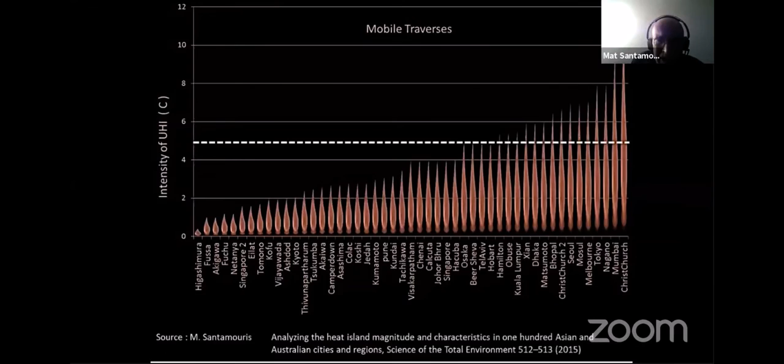But it's not just the increase of the temperature in our cities. This is combined with many other issues, for example, the prolongation of the hot spells. You see, in this specific graph, the hot spells above 37 degrees and also the hot spells above 40 degrees in the Mediterranean area. And you can easily understand that there is a tremendous increase of the periods with very high or excessive temperature in the Mediterranean.

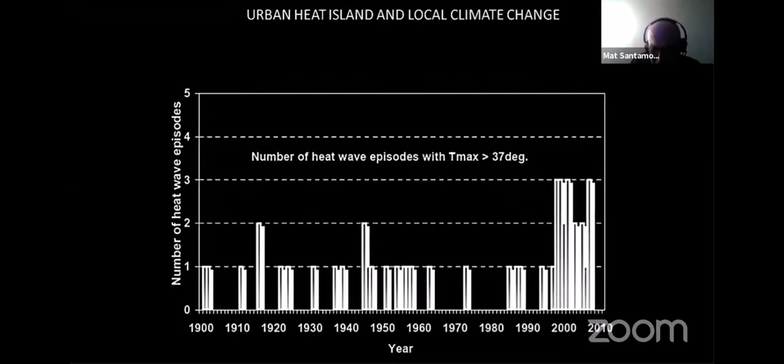And unfortunately, it's not just that. Apart from the temperature increase and the prolongation of the hot spells, we have a tremendous increase of the frequency and also the magnitude of heat waves. And you see, for example, what is happening in the Mediterranean during the very last years. It is evident that such an increase of the temperature and prolongation of the hot spells may have serious impacts on energy, health, sustainability, survivability, quality of life.

And during the very last years, a lot of research has been carried out, and many studies have documented what is happening regarding the energy and health and all the other impacts of climatic change in cities, which is called local overheating. Especially as it concerns the energy consumption and the energy supply, this is extremely well documented. And of course, it is very evident that once we have higher temperatures, the energy consumption for cooling is increasing tremendously. And we expect to have a lower demand for heating.

But it's not just that. The problem is that the higher temperatures increase the peak electricity demand, obliging utilities to build additional power plants. At the same time, they decrease the efficiency of the power plants, nuclear and thermal power plants, and also the performance of the distribution systems. All these issues are very well documented.

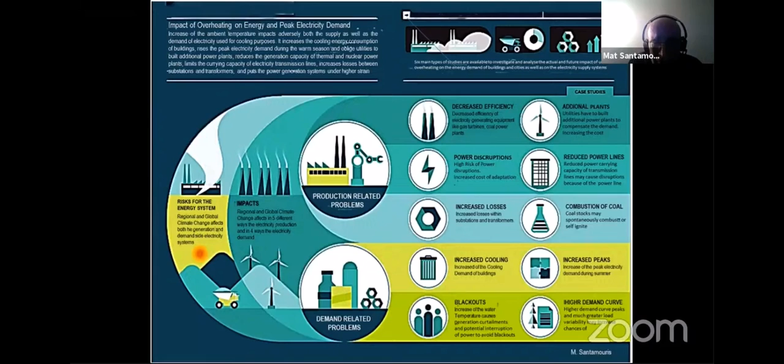And actually, for example, we know very well that the global energy penalty per square meter of a city is close to 2.3 kilowatt hours per square meter, while the global energy penalty per square meter and degree of temperature increase is 0.7 kilowatt hours per square meter and degree of temperature increase.

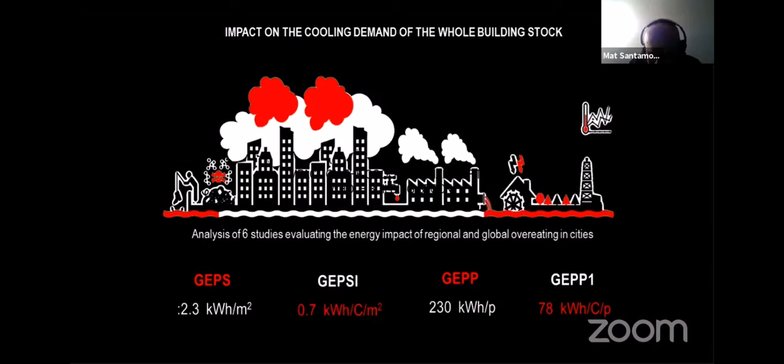But I think it is much better if we report the penalty per person, which is close to 230 kilowatt hours per person, on average all over the world, because of the global and the local overheating. So it is a tremendous penalty that we have to pay because of the increase of the temperature in our cities. And this brings us to the major problem that we will face in the near future regarding the energy supply and demand in our buildings. And this has to do with the future energy consumption for cooling.

If you plot the actual energy consumption for cooling, it is not so high. It is actually this red line you see there. But once we develop some scenarios about the future energy consumption for cooling the building sector by 2050, and we assign 3 different scenarios, one of low development, one of average development, and one of very fast development, we may realize, for example, that under the low development, we may have a tremendous increase

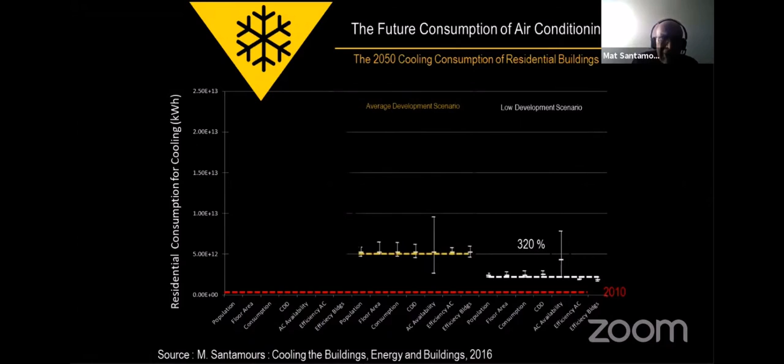of the cooling demand by 2050, which can be of the order of magnitude of 320%, 3 times more than the actual energy consumption. Once we consider an average development scenario, which is much more probable than the low development one, the expected energy consumption for cooling is much higher, and it's close to 750%.

While if we consider a very fast development scenario for the world up to 2050, the expected increase of the cooling demand will be of the order of magnitude of 2,270. Once uncertainties are taken into account, numbers are much, much higher, and we may reach an increase of the demand for cooling up to 2,670%.

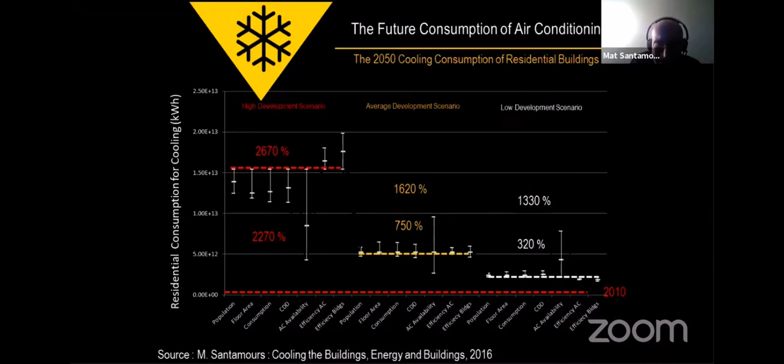This means that we need to have a tremendous number of new power plants. We need to have a lot of energy consumption, a lot of conventional or non-conventional fuels, a lot of peak electricity demand, a lot of emissions, CO2 emissions, a lot of pollution. So we need really to face the problem of overheating in our societies.

I will stop presenting you the data about energy because it's something that is very well developed, but I'd like to move to something which is extremely important: the impact of overheating on vulnerable population, on low-income people. You know very well that low-income people are living in non-well-protected buildings. They don't have the means to be protected, and at the same time, because of economic reasons, they don't have the means to cover the energy needs. So these vulnerable populations, low-income households, are the first victims of climatic change.

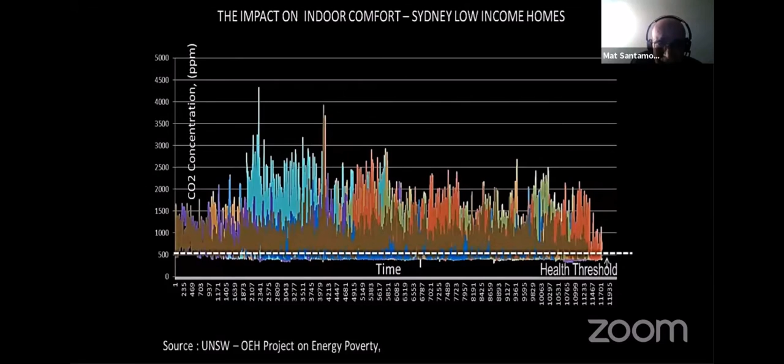And this brings us to the real problem of urban overheating, and what is going to be the main issue for the future about overheating: health. The impact of overheating, the impact of local and global climatic change on health. This is not such an easy task. It's not a deterministic approach where you can write an equation and find the association between temperature and mortality or morbidity. Because there are so many other issues that have to do with health, especially demographic issues, prosperity and income, the local climate, socioeconomic aspects, and the local infrastructure and health. So it is a little bit complex to understand and analyze.

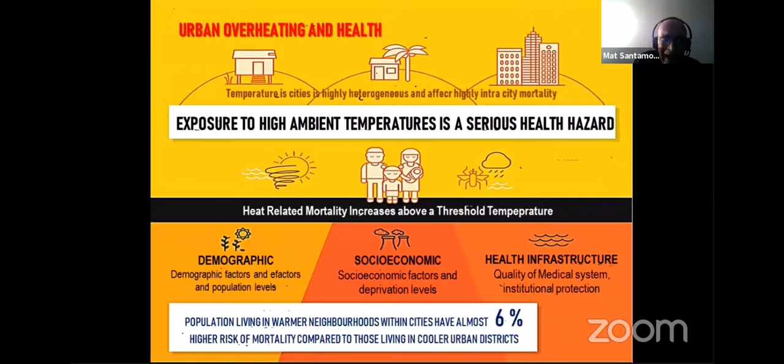But first, what is important to understand is that we don't have the same response to heat. For example, people living in the south of Europe or in the north of Australia may tolerate much higher temperatures than people living in northern countries like Finland or Sweden. This is very clear from all the studies performed during the last years, which show that the threshold temperature above which heat-related mortality is increasing is much lower in the northern part of Europe or the northern hemisphere. And this has to be taken into account by all those who say that it is good for northern climates to have the increase of the temperature.

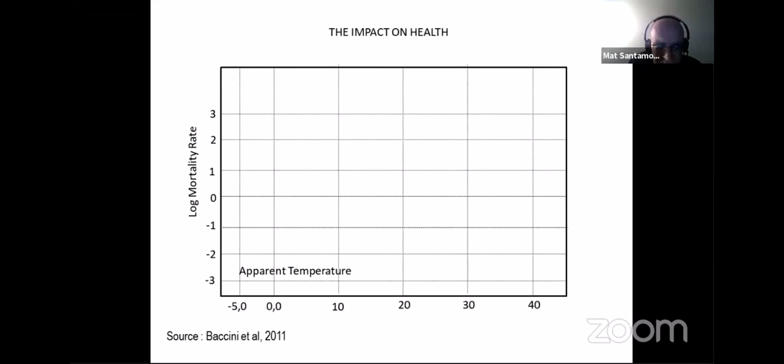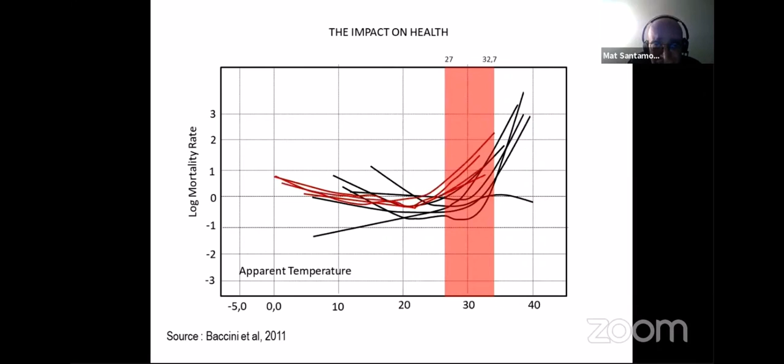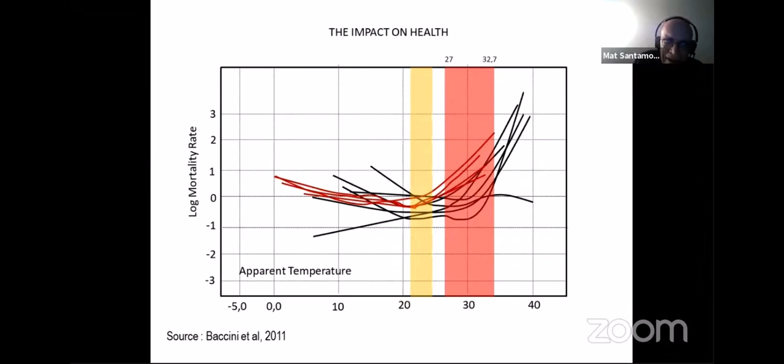And I'd like to show you the results of a very recent study performed in different European cities, correlating the indoor temperature and the outdoor temperature with heat-related mortality. You see, for example, the results for some Mediterranean cities, Athens, Barcelona, Madrid, Marseille, etc. The threshold temperature above which heat-related mortality increases almost exponentially is between 27 to 32.7 degrees. Once the same curves are plotted for northern climates, London, Stockholm, Finland, etc., you may see that the threshold temperature is much lower, 21 to 23, 24 degrees. So this is very important when we plan the mitigation, adaptation, and resilience plans for different parts of the world.

And this affects very much the quality of life in our cities, because actually we know that during extreme events, during heat waves, a very high part of the local population is suffering and is dying. And unfortunately, up to now, we have data only from developed countries. We don't have data from developing countries because the systems collecting health data are not really so well developed.

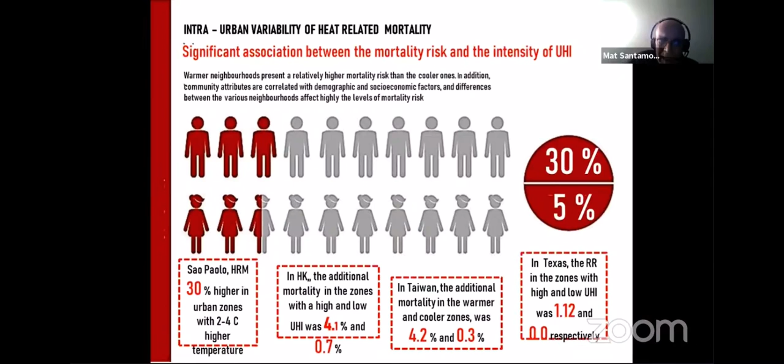What do we know? We know actually that in less developed countries, during heat waves, almost 30% of the population is affected and may suffer from increased mortality and morbidity. While in countries with very advanced systems of protection, this percentage may be reduced up to 5%, but even 5% is very high.

And I'd like to show you the map of the heat-related mortality in Sydney, a very developed city, one of the best cities in the world. In the eastern part of the city, which is next to the coast, temperatures are very low. In the western part of the city, which is close to the desert, we have almost 10 degrees of temperature difference in a distance of about 40 kilometers.

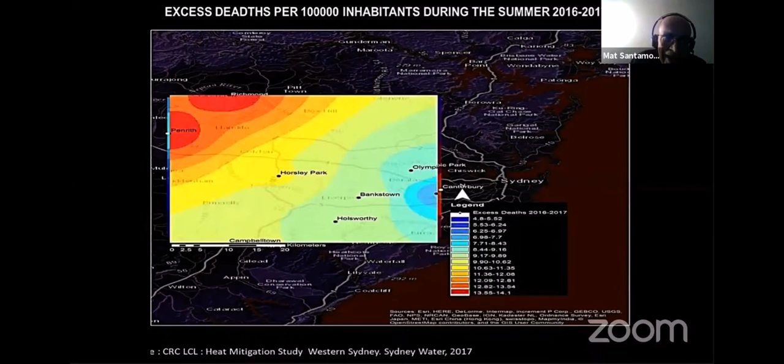I just like to show you the mapping of the heat-related mortality during February 2017. You see that during the same day, normalized data in the western part of Sydney, because of the overheating and because of the lower income, heat-related mortality was 3 times higher than in the eastern part of the city. So there is a tremendous impact of overheating on our quality of life and also on our health.

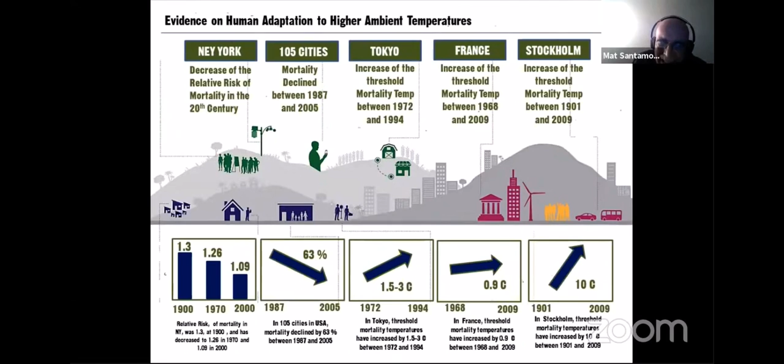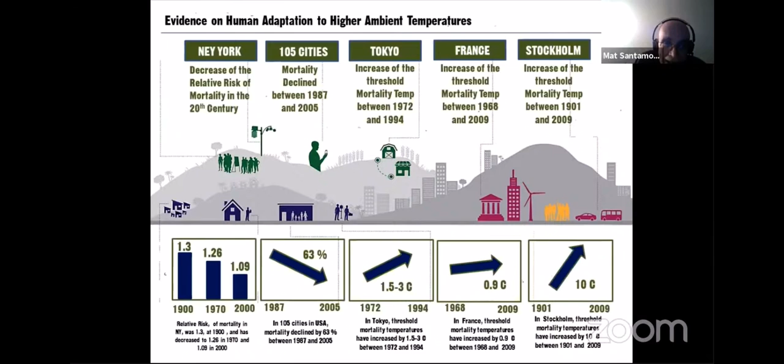What about the future? Many scenarios, many papers, many works about the future mortality and the future impact of overheating on health. And everyone is expecting that this will increase. But this is not sure at all, because we are adapted in a physiological and technological way. If you try to analyze the data of heat-related mortality with temperature during the last 100 years, you will see that although temperatures have increased, heat-related mortality has decreased. Why? Because we are better adapted to this, and because we are better prepared to face the problem of overheating. So it is a very complicated and very important issue, but it is the main issue that may affect our future.

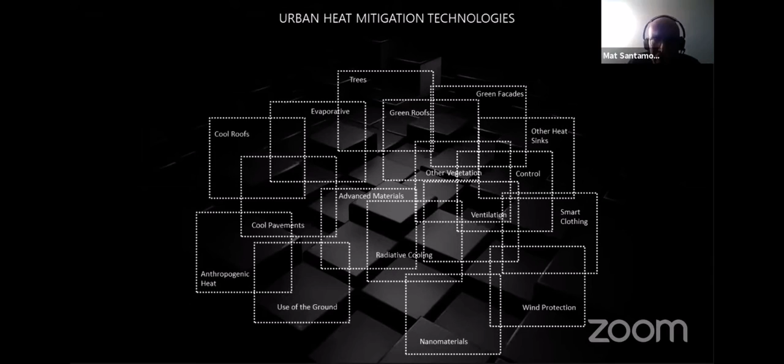I have presented you bad news. Now it's time for good news. During the last 20 years, there is very intense research trying to investigate ways and technologies to decrease the temperature of our cities. So we have developed a very high number of very advanced mitigation technologies, and you see some of them on the screen. I don't really like to go through all the mitigation scenarios. I don't have the time.

But I like to start by telling you that what is important when trying to develop a mitigation plan for a city is to have a very good diagnostic tool to understand what is happening. It's like in medicine, where we need to scan someone to understand what is happening and then give the proper medicines. If we don't scan, if we don't know, if we are going in an empirical way, we risk solving another problem.

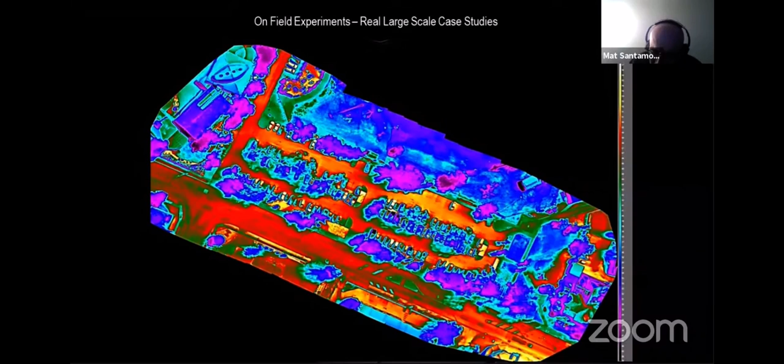So actually, we're able to scan and have information with a resolution of 2 centimeters by 2 centimeters in a city. And you see, for example, some aerial pictures that we have taken for an Australian city, Alice Springs, that show the hotspots 2 centimeters by 2 centimeters. And this helps us to understand how and where we have to intervene. Or the use of very advanced UAV systems can really help us to understand where the problem is.

What is very important as it concerns the development of mitigation technologies is the progress we have achieved in regards to mitigation materials. Materials that can be used in the city, in buildings, to help decrease the temperature of cities. And many years ago, we started with the so-called cool materials, very reflective materials, white materials that reflect radiation and decrease the temperature in cities. But it's not possible to have white everywhere, while in the Mediterranean, this is very common.

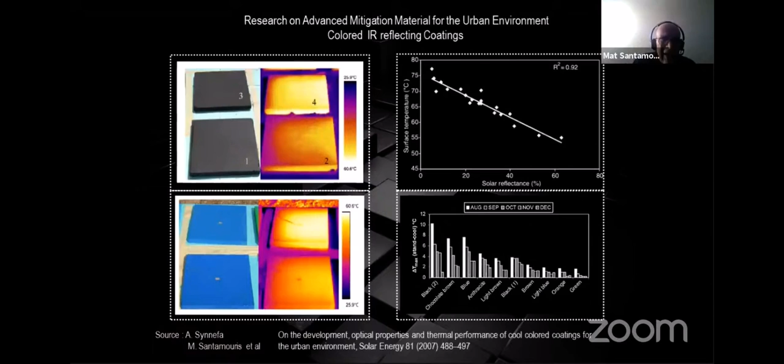And during the last 10 years, we have developed the so-called infrared reflective materials, materials that have any color you may wish, but at the same time present a very high reflectivity in the infrared part. So you may have any color with much lower temperature. And you can see in the graphs that you may have, for example, a pavement which is about 10 to 15 degrees lower surface temperature than a conventional one, even a black one. All these materials have been developed and are commercially available, and there are more than 250 large-scale projects all around the world where this kind of materials are implemented.

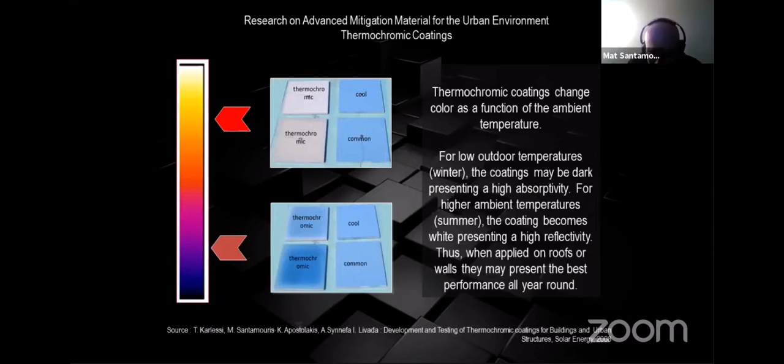Then we move to some more sophisticated techniques, color-changing materials for the urban environment, thermochromic materials: materials that when temperature is quite low may be absorbing, black or any color you may wish, but during the summer period when temperature is really high, this material becomes white and so reflects radiation. And during the next winter, maybe black. These materials are developed. Now they are almost commercially available for cities. And we have achieved up to 25 degrees lower surface temperature.

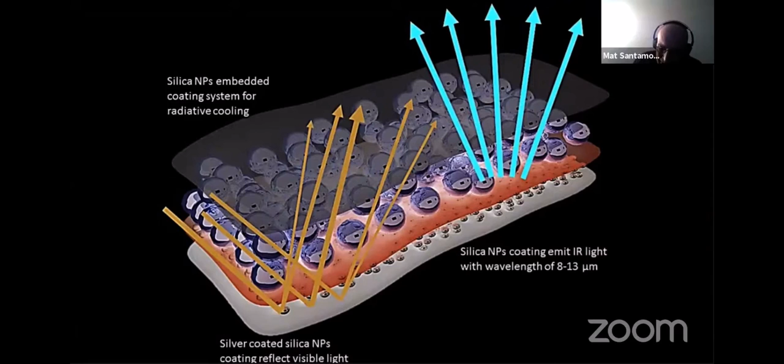But during the very last years, and I can say during the last six years, there is a revolution as it concerns materials for the built environment. And this has to do with the so-called photonic materials or daytime radiative coolers. These are materials that present a very high reflectivity to the solar radiation, more than 95-96%, but also can emit in the so-called atmospheric window, 8 to 13 micrometers, so they can really reject the excess heat to space. These materials have been developed and can really achieve a very low temperature.

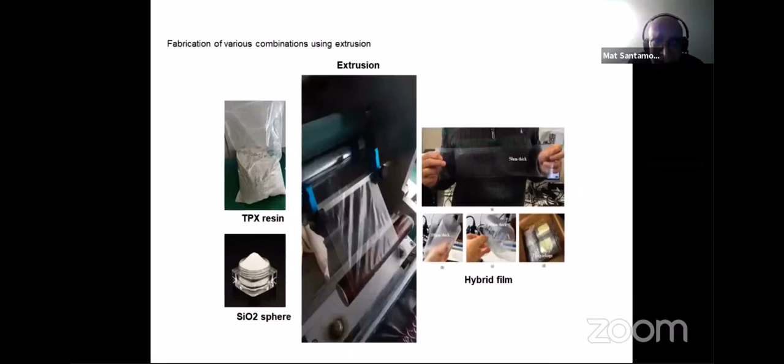So these so-called super cool materials are extremely promising and may really help a lot to decrease the temperature of our cities. You can see some of these materials as developed, the photonic materials, and some results for a recent project with photonic materials we have in Western Sydney.

Another stream of important research regarding materials has to do with the so-called fluorescent materials, especially quantum dots. These are tiny materials that have a very high, not reflection in reality, but fluorescence. I mean that these materials, when they absorb radiation, re-emit in different wavelengths through fluorescence. So in reality, they do not absorb, so they are not heated.

We have developed mitigation materials for cities based on quantum dots and photonic materials. And actually, we have achieved almost 11 degrees lower surface temperature by using these materials. This is at this time at the laboratory test stage, and we plan during the next years to commercialize this.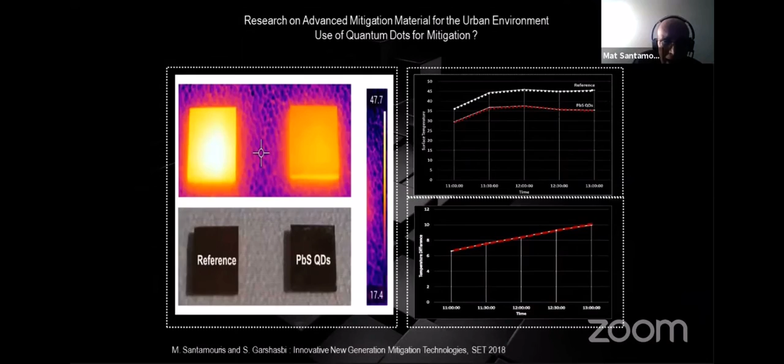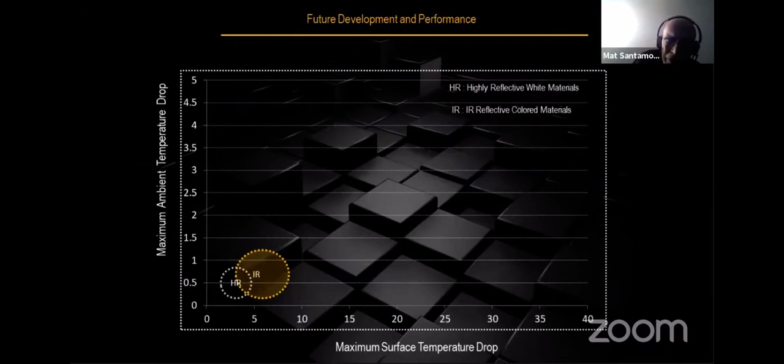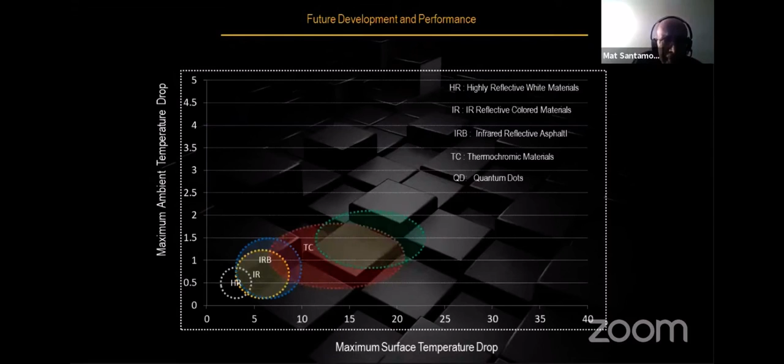So where we are: we started 20 years ago with reflective materials, and we have achieved a decrease of the temperature of cities up to 0.5 degrees. Then we had the so-called infrared reflective materials that really helped to decrease the ambient temperature of our cities up to 1.2, 1.3 degrees. And then materials of advanced technology like thermochromic materials, quantum dots, radiative cooling, and many other things that are developed. When all these technologies are implemented, and we have more than 450 large-scale mitigation projects all around the world monitored, we achieved to decrease the peak temperature of cities up to 2.53 degrees.

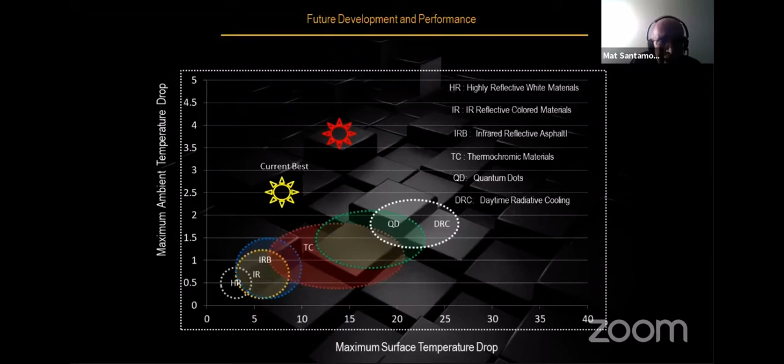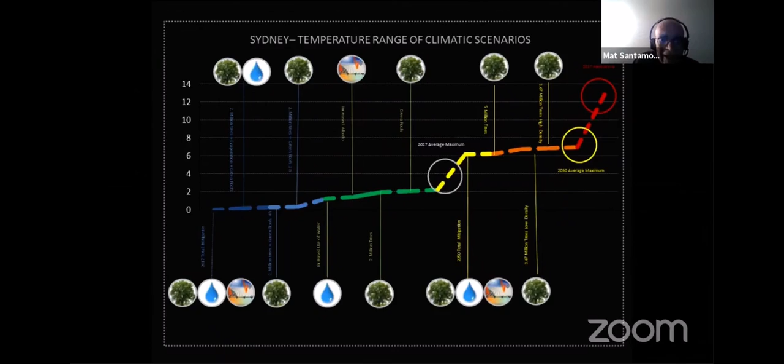On the contrary, if we are proactive, if we really apply and implement the developed technologies, not the future one, the existing one, we might move to the left part, which is really a decrease of the temperature by 2 degrees. So there is really hope that can help us really to survive in our cities.

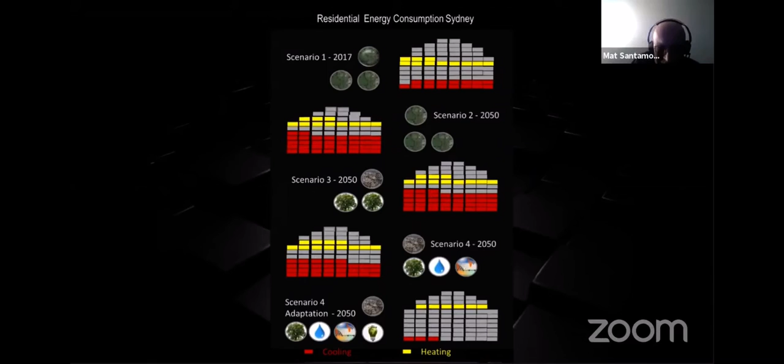But the good news is that once we apply mitigation, better cities, and adaptation, better buildings, in our buildings, the cooling load may decrease by 80-90% because we have the technology to do that, and also the same for the heating load. So there is hope. Once we really apply advanced technological developments in our cities and for our buildings, yes, we can respond to the climatic change.

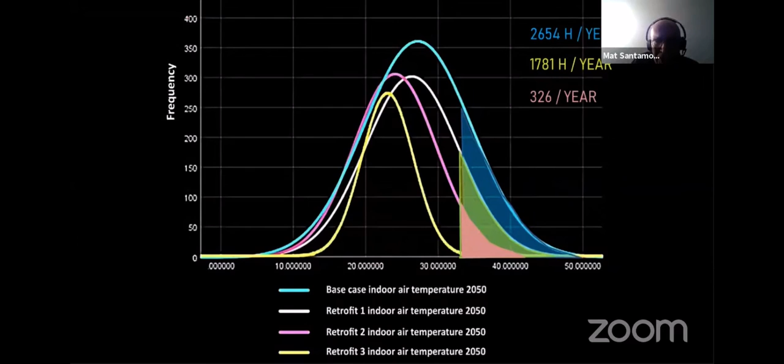Once we apply business as usual technologies for adaptation, better insulation, better ventilation, etc., this may decrease and be this part. Once we apply at the same time advanced adaptation scenarios and adaptation technologies for our building, this may decrease at this specific level. But once we have mitigation and adaptation at the same time in our cities, the energy consumption will be very close to zero. So yes, it is possible despite the overall climatic change, global and local climatic change, to have zero energy settlements, zero energy buildings, for 2050 and respond to the climatic change.

In conclusion, we face a very important problem of climatic change in our cities, up to 10 degrees of overheating. And this has a tremendous impact on energy, 200, 300% more energy consumption in some parts. This has a tremendous impact on peak electricity demand, obliging utilities to build additional power plants. And this has a terrible impact on mortality and morbidity.

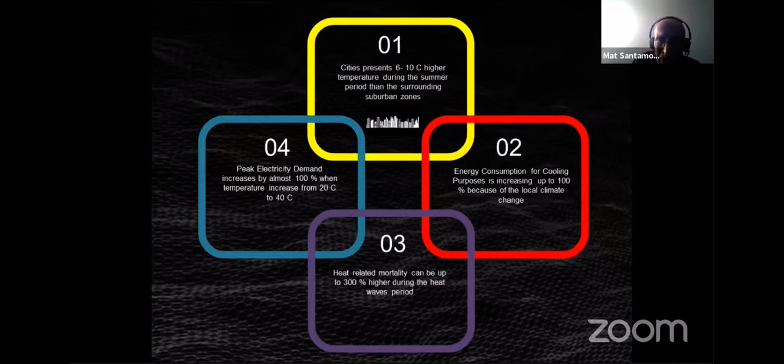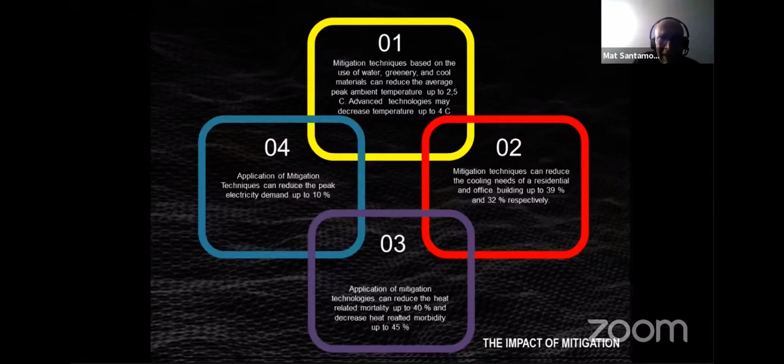The future of the building research has to be done in a holistic and integrated way. What we are doing now is that everyone is following his stream. I'm doing energy, you are doing comfort, he's doing epidemiology, the other is doing economics of the building sector. Another one is doing something that has to do with sustainability. And we don't communicate. We don't really integrate the results and the findings from the different parts together.

So there is a very important condition. In the future, we need to have a holistic approach. We need really to discuss and at the same time integrate our research in a common platform, a platform that will take into account all the different levels and all the different knowledge and all the different disciplines that really affect the built environment in a more holistic and more integrated way.